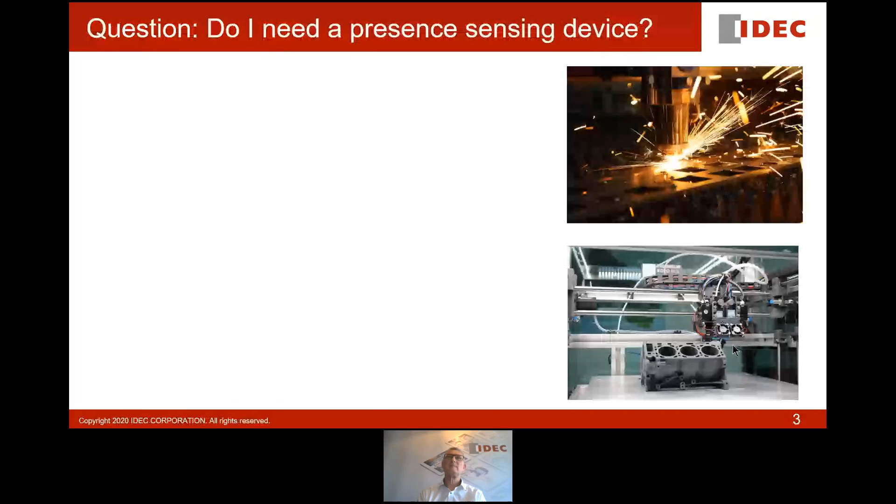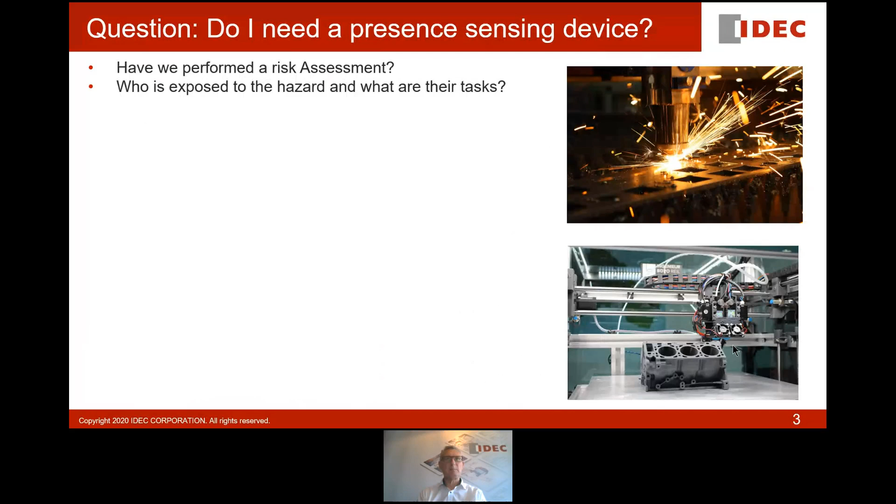So, some questions. Do I need a presence sensing device? Well, as in all of the other webinars I've done, there's a very simple question: have we performed a risk assessment? We need to identify who is exposed to the hazard and what their tasks are, what they're doing on the machine. Once we know what the individuals are doing and we've made a list of all the people who are in contact with the machine, we have to identify the target.

Is it their hands, their fingers? Maybe they're leaning into the machine, so it's upper body. It could be that they have to lean a long way in and there's a risk to the torso, or perhaps stepping inwards would create risk to the lower limbs. Potentially, as for example with robot cells, you have to go whole bodily into an area which has got a lot of space around it, like a robot.

Once we've looked at that area, we have to say, well, if we want to use a presence sensing device, is there in fact a risk of part ejection? Because of course, once we remove the mechanical guarding that is separating us from that hazard, we have to consider, is there, for example, any risk of swarf being ejected out of the machine as it's cutting? Perhaps material from pressurized processes could be ejected either through a fault or just because it's what happens when you open the tooling. But it needn't necessarily be a mechanical obstruction or a mechanical risk.

It could be radiation. It could be the ejection of sparks coming out from a weld cell. So yes, we're looking at a robot and we're protecting against mechanical contact with the robot. But in car plants, for example, you see sparks going 5-6 meters away from the center point of welding. We have to identify there's a mechanical release of parts.

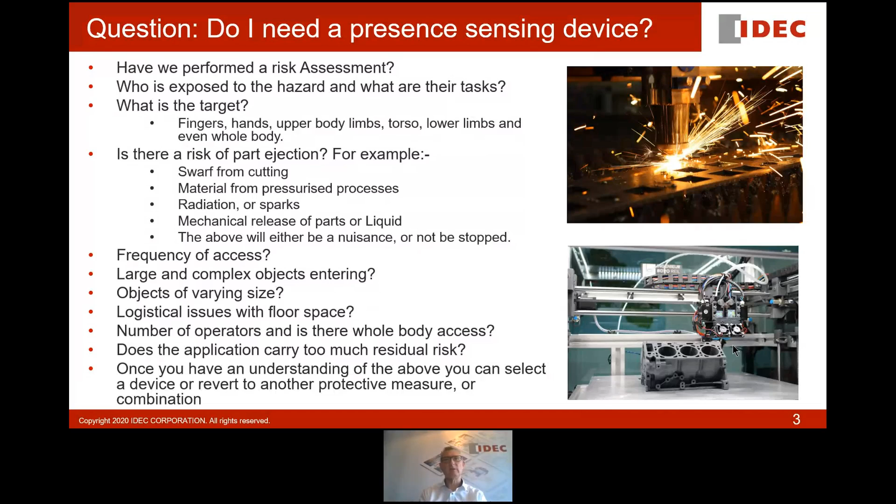At the end of any application, you should always look and see whether or not there is a level of residual risk that you can tolerate. If you can't tolerate it, you go back to the beginning of the process and start again until you've reduced that risk. Once you have an understanding of everything, then you can select your device or potentially revert to another measure. Quite often you actually revert to a combination of measures between perhaps a light curtain and some guarding and a pressure mat and so forth.

We use presence sensing to effectively prevent harm. The most obvious thing is we have a gap in front of a machine, and we perhaps put a light curtain across the front of that gap, and that creates an invisible perimeter. Usually it's very obvious because 99% of light curtains are painted yellow and they stand out very clearly as being there for a reason.

It's quite common to combine that light curtain along with other mechanical measures like side guarding and such like. But of course, we can also have protective measures like pressure sensitive mats, and we can use laser scanners which detect and send out a beam into the area. We'll talk about that a little bit more in a moment.

But the key to selecting your presence sensing device is stop time testing. The purpose is that we should identify the position of the device in relation to the hazard once we've ascertained the known direction of approach. So from our risk assessment, the man moves from the pile of material to the machine and he walks through in this direction, or he reaches in this direction, or even steps in that direction.

Therefore, if we know where he is moving from and to, the next thing is to determine how fast he is going. And that is the approach speed. So it's really important that we measure the real stop time. And not only do we measure the real stop time of the machine, but that we identify the actual machine conditions over its entire life.

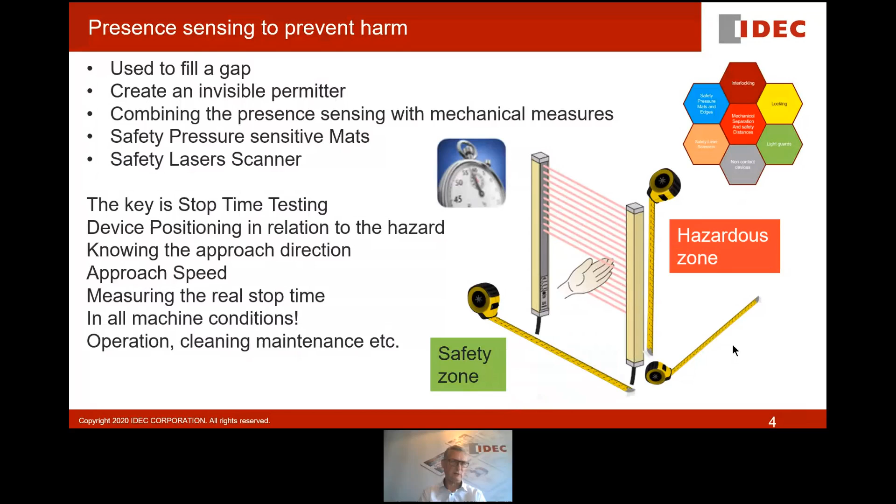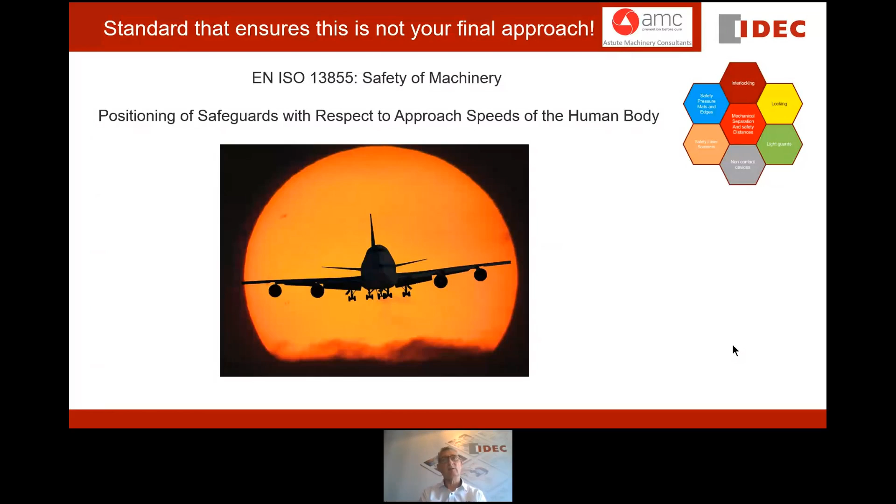So in order to do that, we have to get on to the boring bit, which is EN ISO 13855, safety of machinery. It's a harmonized standard under the Machinery Directive. And rather cheekily, it's put there to make sure that it is not your final approach to the machine. It deals with human approach speeds.

To come back to the very beginning, we do this because the Machinery Directive very clearly states that moving parts of machinery must be constructed in such a way to prevent risks, and the installation of guards or protective devices have to be put in place to make sure that you keep the operator away from that hazard.

And of course, you have mechanical guarding, which is covered by EN ISO 13857 and talks about the reach over, reach under, reach round, and reach through, the position of your guards.

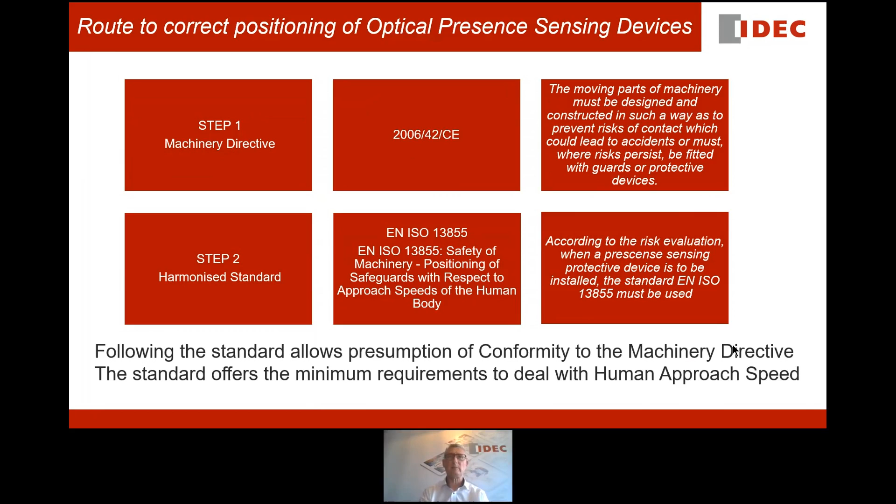And 13855 helps you calculate and understand where to locate a presence sensing device so that the machine has come to a stop as a result of that switching off function and then the loss of the residual speed or energy that is present during the shutdown process. We'll talk about the stop times in a few moments.

So we can use light curtains, pressure mats, laser scanners, in fact, any device that detects the proximity of a worker in the workplace, provided that device has a monitorable safety function that complies to one of the harmonized standards of the Machinery Directive. But we shouldn't just consider the light curtains and the mats and the scanners.

We also must remember that a fixed guard may also require a stop time test. And you might say, well, why would I do that? It's a guard. Surely when I open the guard, the switch goes click and the machine stops.

Well, a single guard, when you open it, does stop, and it does create a gap that you can then place your hand through. So if the machine is going extremely quickly and you open the guard, you still need to put your guard sufficiently far away from the hazard so that it's come to a halt.

And if you use things like hinge switches, there is in fact typically a 5-degree hysteresis, so that you can move that open 2 degrees, 3 degrees, and it won't have switched. And if that's a big door guard, you may be able to get your hand in, and therefore, the triggering point allows quite a depth of your hand to go through before it in fact switches off.

And that really brings us on now to the means of detection. So we have some pretty fundamental things. We want to detect people's hands, and therefore typically there is a resolution of 14 millimeters or less of the protective measure. And that means that your fingers, as they pass through, will be detected very early.

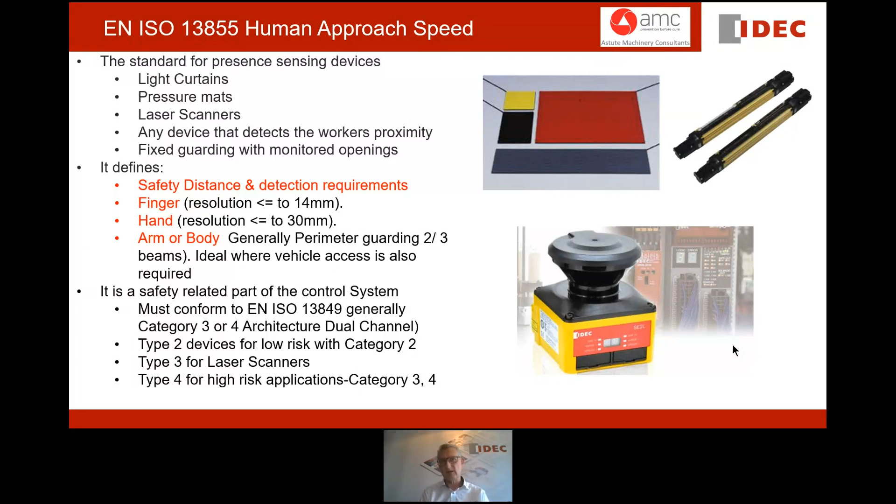So 14mm light curtains for finger detection, 30mm light curtains for hand detection, 40 for upper, 70 for lower limb. So there we're starting to talk about people stepping forward and detecting the ankles. And then we also have 2 or 3 beam multi-beam detection, where there are extremely large gaps between the beams.

And then we come into the area of, well, surely a human being can step through or lean through. And when you are utilizing the large beams, it's for a perimeter, which is considered to be a significant distance away from the hazard. And we do it so that we can make sure we can have easy access for maybe forklift trucks and that type of thing.

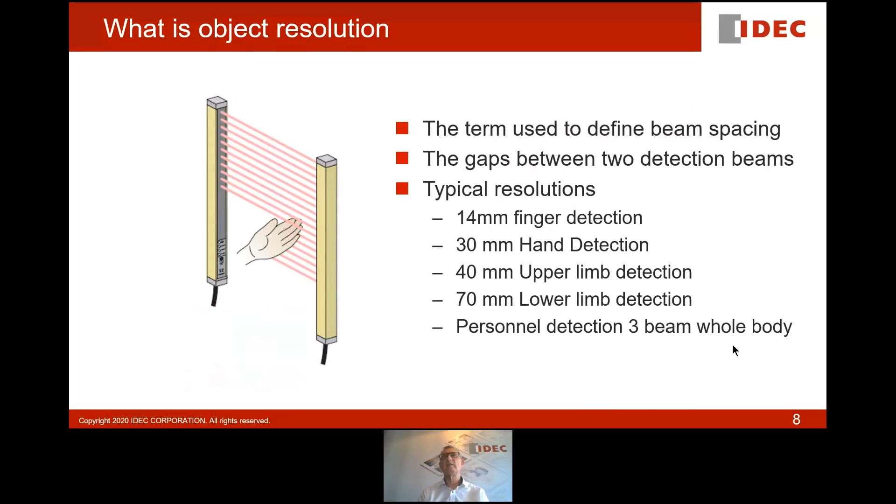So what makes up the stop time of a machine? It's quite important that we understand the principles.

So the stop time is the time from when the protective measure is actuated, so when I cut the beam or when I step on the mat or stand in front of the scanner, until the process has removed the energy and that risk has gone away. Or if it hasn't gone away, it may have been reduced down to an acceptable slow working speed. So we accept that risk is okay. So it may be going very slow.

And it's achieved dynamically by measuring the dwell time between that stop trigger point and the actual removal of energy from the machine.

You can actually generate your stop time using software. For example, if people are using complex control systems with motion control and they've got that motor directly coupled to the machine, it's generating the motion. Because of the motion analysis software that exists, we can actually have a very detailed analysis of exactly how long it takes for that shaft of rotation to come to a halt.

So it is quite common for people to determine their stop time using their motion analysis. Now, I have to emphasize, you can only do that if the motion and the motor is actually directly coupled. If it's belt driven, you shouldn't be doing it. If it has some kind of reciprocating motion, you shouldn't do it, because it's unlikely that you're going to be able to detect all of the angular deflection as well as the backward and forward detection.

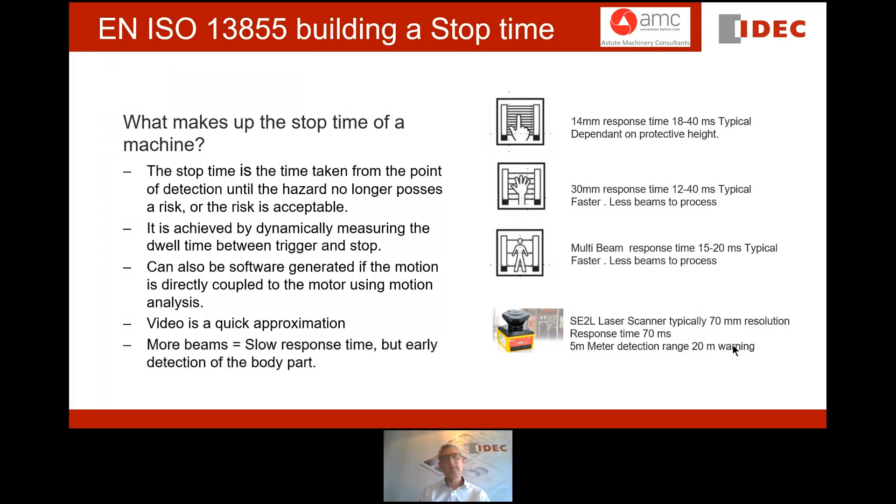So let's have a look and see what it actually says in the standard about stop time. Well, there's 2 numbers you need to remember, 3 I suppose. The letter T is the total stop time, and T equals T1 plus T2.

And T1 is the actuation of the device, the putting of the hand through the light curtain, and that light curtain's response to actually shut down its output. And once it's shut down its outputs, it's going to turn off things like a safety relay.

The safety relay is going to feed to the PLC, which is going to switch off the primary switching elements, which is then going to turn off the final drive. And then if there is any residual energy, finally we get to the termination of the hazardous machine safety function, which is C. So you have T1, chopping the device, stepping on the device being detected.

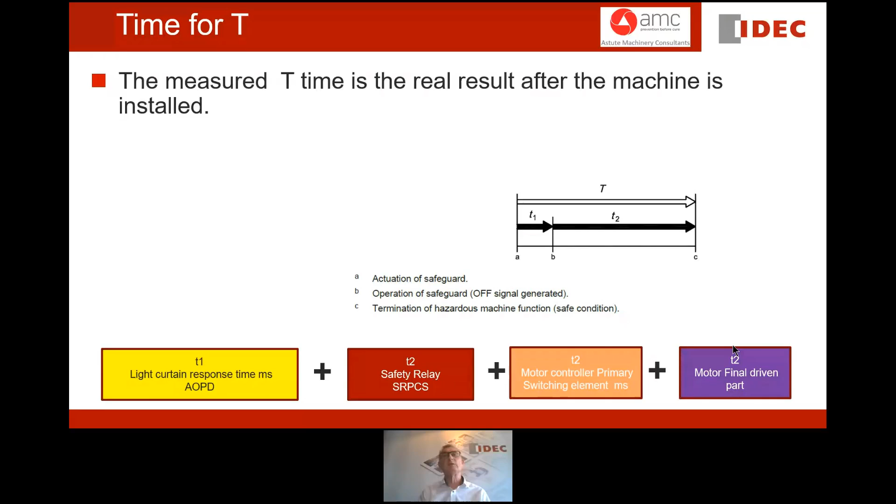Then you have the sum of the items that are in the control cascade to shut it down. And then you've obviously got the physical movement and things that step away.

So you need to make a design analysis. The design phase, you need to make an analysis and understand approximately where you're going to be. But it's really important that the final installed piece of equipment is tested. And also, periodically it is tested, because as bearings wear, as machines bed in, then the rundown times continue.

Maintenance may fit a new variable speed drive, for example, and as a result, the frequency may have been 55 hertz or 60 hertz instead of 50 hertz. Well, that means that the machine is running faster. If it's running faster, it may mean that it actually takes longer to run down because of the 20% increase in speed that would project.

So reasonably regularly, maybe once a year, once every couple of years, do a test to make sure the machine is actually still working in the way you expected it to be.

And as I've said on every single presentation, you do a risk assessment whenever you make a change on a machine's function. If you change its fit or form, you need to also go through and make sure that your light curtain is in the place that it should be, that was intended by the manufacturer when they designed it.

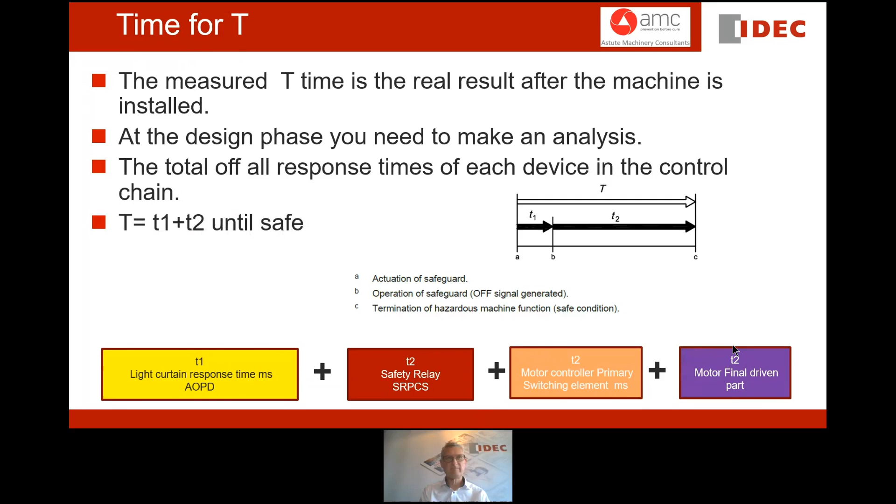So it's possible that we might want to combine measures. For example, in the bottom right, you see there's a light curtain combined with mechanical guarding. It makes sense because light curtains are pretty expensive devices, and a robot can aggressively make mistakes, especially during programming. So if you have a risk of part ejection or side ejection, you put the mechanical guarding in. It's a cost-effective way of doing it.

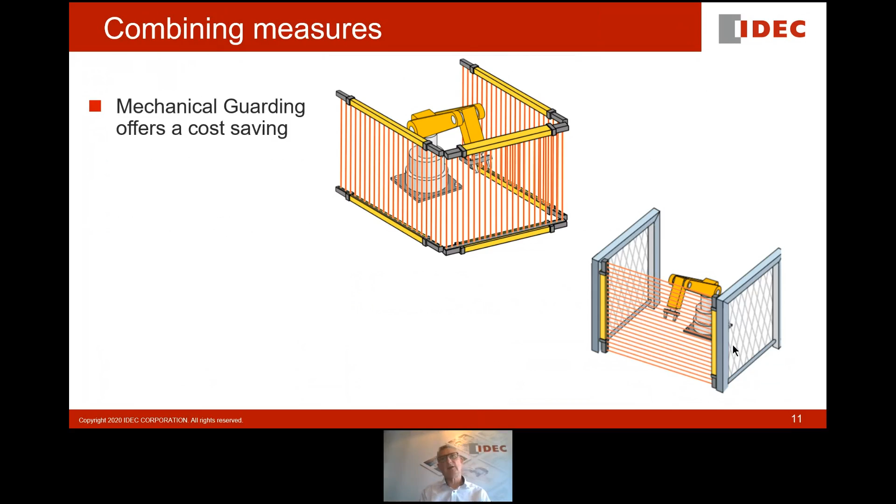However, if space is an issue or you need access from multiple directions, it's quite conceivable that you could put in light curtains either in the vertical, like shown here, or in the horizontal as well. One idea is to actually have the light curtains set back out of the way, and then you simply put mirrors in the two leading corners.

If you cascade, you can get great flexibility in the workplace. You can get multiple operator access going in from multiple directions, which is useful in a two-operator environment where you've got left and right feeding. It's very flexible, but it also has to be taken into account in the risk assessment, because anybody can walk into that zone.

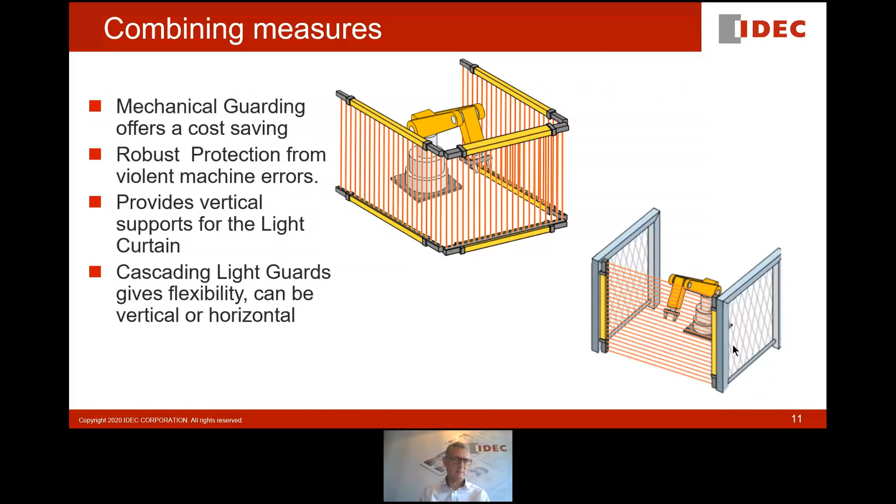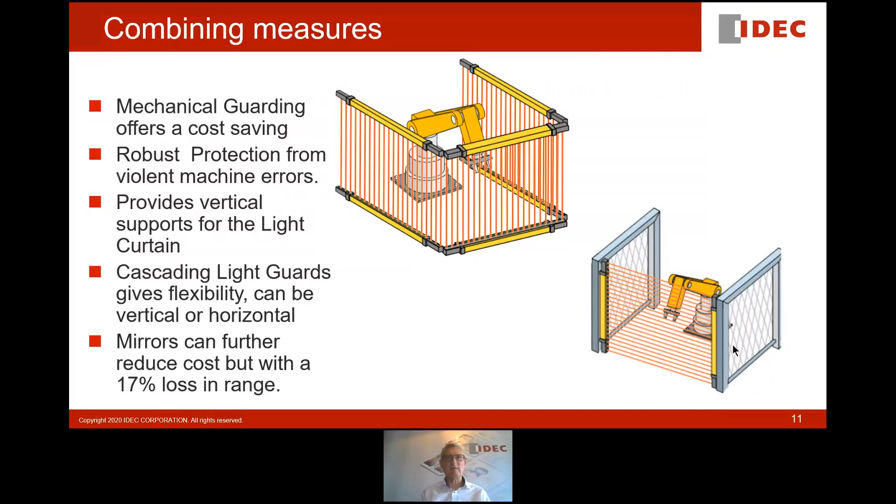If we project the light around the machine, we can do it. It's quite easy to do. But we have to remember that as we project it around, each mirror you go through can lose as much as 17% of the range. That's actually really important, because if you've got a 10-meter light curtain, you go through a mirror, that mirror takes away 17% of your sensing range, and the next mirror takes away another 17%.

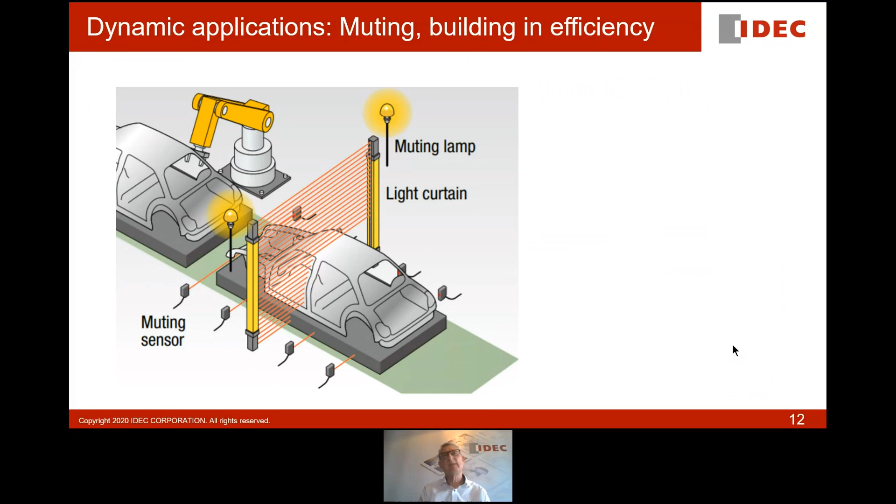So if you install light curtains, you need to do it in such a way - and I talked about this before regarding the automotive industry - of moving products through, detecting the product, but not actually ensuring that the person can pass through next to the product that's going through. And that way we introduce muting.

Muting is a deliberate suspension of a protective measure. And it has to be temporary. And it has to be designed to avoid accidental or deliberate entry by an operator.

So when a light curtain is triggered, you'll notice there are muting sensors on the illustration. They detect that there is a vehicle approaching, and it forms a controlled cascade of temporary shutdown of the light curtain, and then a controlled reinstating of the light curtain.

It's important that the spaces to the left and to the right of the conveyor and the product that is there - it's really important that people cannot walk through those gaps. They can't use other objects to try and trick the sensors, because if you pick up a cardboard box and walk through the beams, you will look remarkably like a car or a cardboard box, and you can then trip the device in an unsafe way and get in.

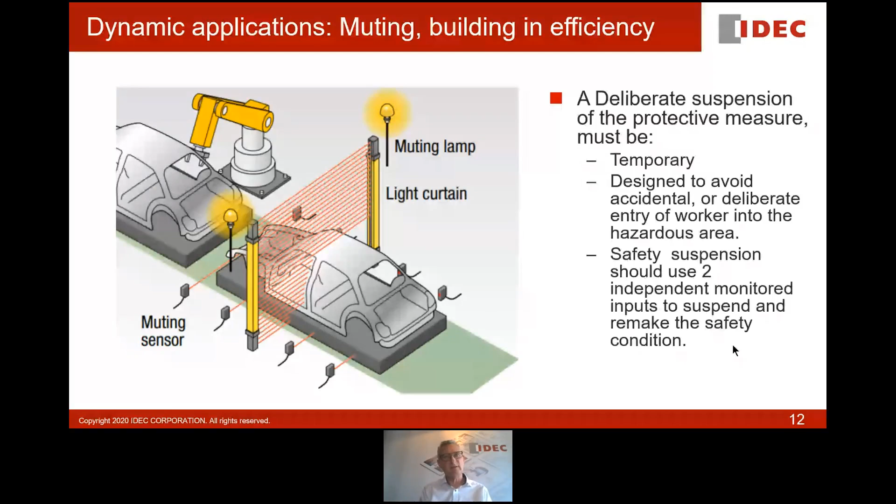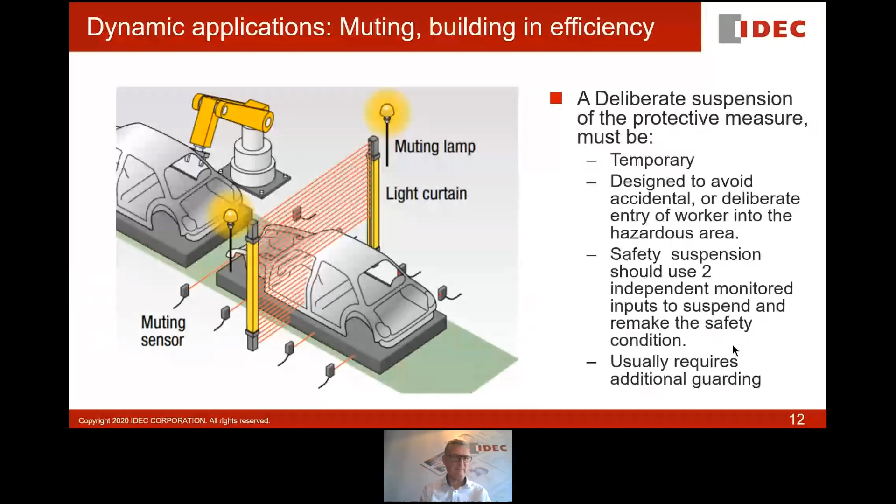So the positioning of the beams is absolutely critical, and they have to be monitored. They use a monitoring technique and a monitoring relay that is preconditioned and set up to try and stop people from triggering, tripping, and cheating on the application. You often need mechanical guarding and additional measures to prevent people from getting in, so giving them large amounts of space either side is a bad idea.

But there's always the case where you fit your protective measure, and you think you've done your calculations right, and you need to pass the conveyor through. We've got some nice flat products there on the conveyor, and we want to pass the conveyor through, and we need to use a thing called fixed blanking.

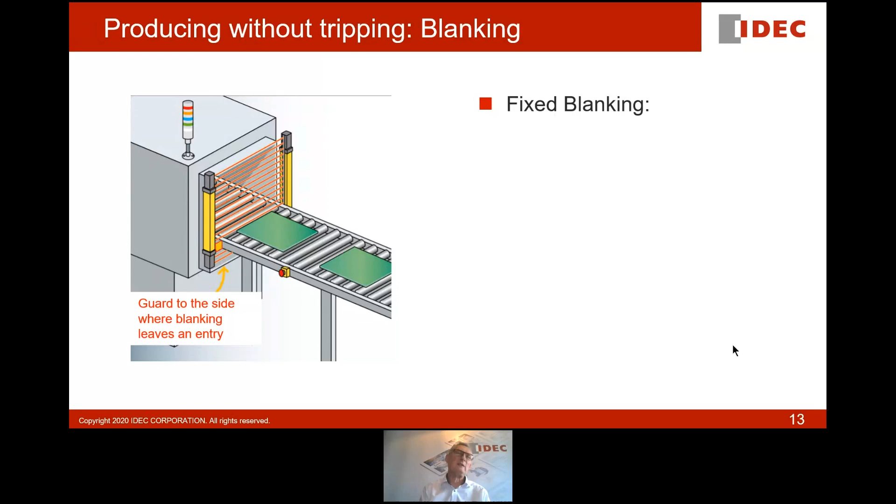But when we put the fixed blanking in, we actually have to teach the light curtain to ignore the structure that is put inside it, because obviously the light curtain currently in that application would trip on it. So we install the guard, we install the light curtain, we install the conveyor, and then we have a situation where it won't work. We go in and program out the beams. So once we've taught it, it ignores that intrusion. But that also means that to either side of it, there is now a gap.

If, for example, that was a 14mm light curtain and we've cut out 2 of the beams, we've now got a gap of 14 plus 28 plus 14. That is enough for me to get my arm through. So if you look at the left-hand side of the illustration, you'll see a square representing a piece of mechanical guarding that's been put in, because currently the resolution isn't 14mm, it's arm detection at 40mm, and therefore we'd have to move that guard substantially further back from the hazard.

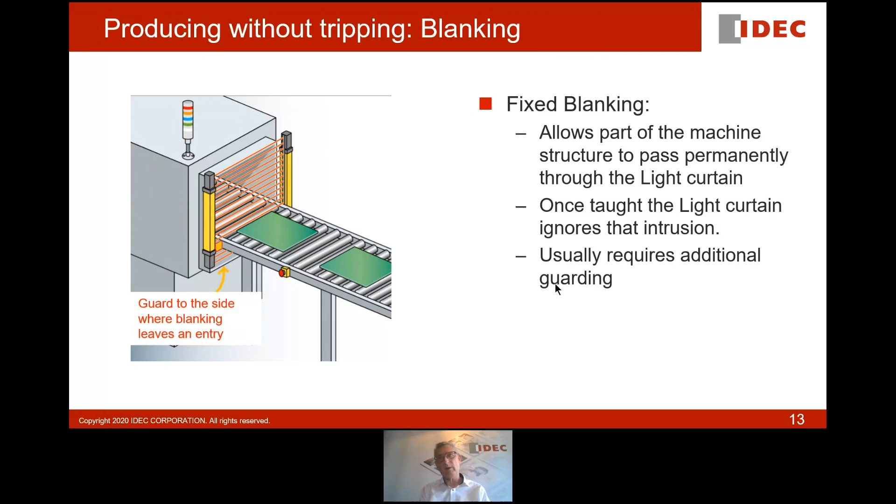So it usually requires that additional guarding. I've got to say, in my 8 years of consulting prior to this role, nearly every time I saw blanking, the customer had forgotten to install the mechanical guard. And when they had moved the guard away from the machine, they had failed to put side guards in to prevent people from reaching around.

But a lot of applications aren't as cut and shut as fixed blanking. If you go into the metal stamping and pressing environment, you'll see a reel of material being unfed, or in the paper industry, a reel of material being unfed, going into a machine. It will flex and go through light curtains, and periodically, yes, it will trip the beam. So for that, we have a technique called floating blanking.

What happens is that as it cuts a beam, the beam above or below it can then dynamically be switched off. So if we cut one beam, the one above or below allows a non-tripped condition, and it allows it to flex, because as the material goes slack, it will drop, come back up, and go back down again. This gives us a very dynamic condition.

But again, like with the other one, because I'm allowing one beam above and below to be switched off, I've also reduced the resolution. So it's very flexible, but you're guaranteed that you need to move the light curtain further away, because our 14mm light curtain can no longer detect our hand — if we put our hand next to the material, or at the same point, we can create a non-trip condition, because we can get through this large gap. It will only work at the beam that is cut, the one below or the one above.

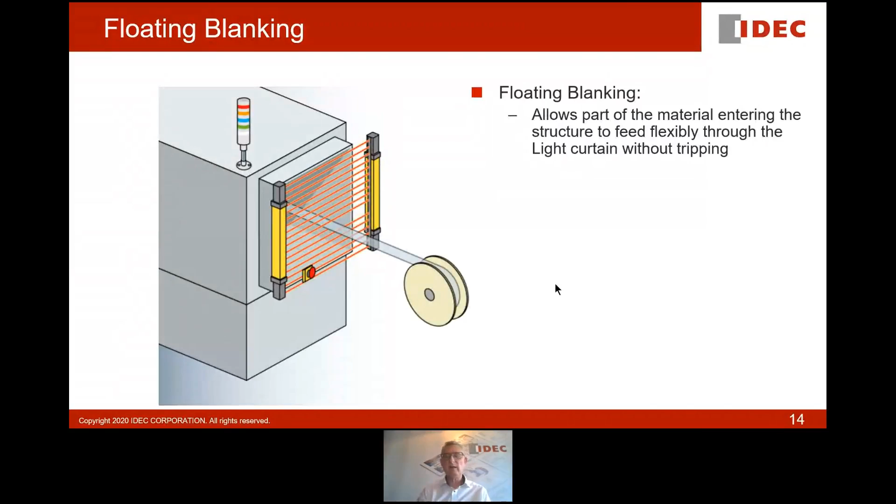So you can't just reach in at the top and get it to mute. It will only be floating blanking at that place, so it ignores the intrusion and allows the material to flow and flex going through.

Hello? Sorry, oh, we've lost Tim for a moment. Do apologise. Tim, are you back with us? I can hear you, can you confirm you can hear me? We can hear you now. If you can go back a couple of slides, sorry. How far would you like me to go back, Andy? Just one slide. Yep, this one? Yep, that's it, thank you.

So laser scanners allow a lot more flexibility because they can look around corners. As you see here, this one could look at 270 degrees of angle. We can teach it to ignore parts of the machine and be very flexible in the environment around it.

It's used in areas where you have very complex pieces of equipment moving in and out. It's also ideal if the structure and size of the machine changes, determined by maybe a vehicle being there, or the size and width of it changes. So it's quite dynamic because you can program it with different patterns and it automatically adopts the new pattern you've programmed in. Plus, the fact that they can monitor encoders gives you the chance to identify speed, direction, rotation, and even use it on mobile applications.

Most important thing in relation to EN ISO 13855 is the detection and the safety detection range. So our scanner has a 5-meter detection range, but what's neat is you also get a dual warning zone, and you can get up to 20 meters of warning in front. That warning can be used to give different speed conditions and such like, and we'll cover that in the next slide.

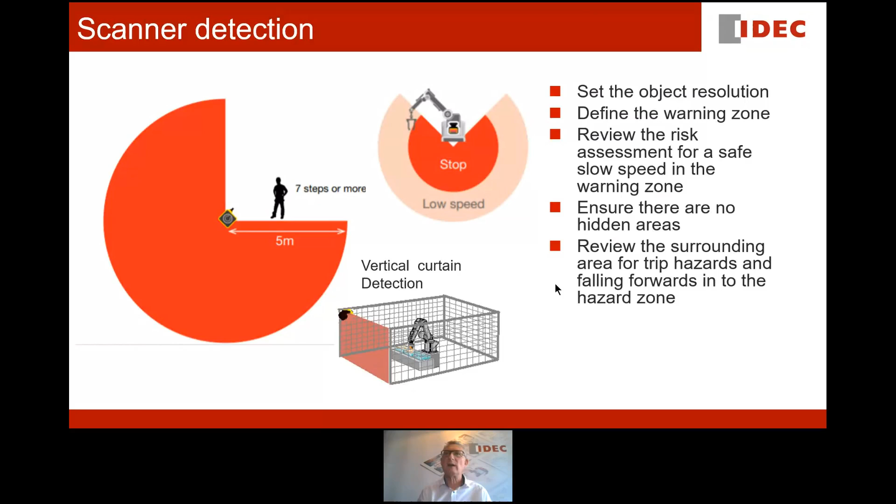Now, the laser scanner - people tend to visualize it as being something that's multi-directional and multi-angular. It's not. It's a single slice over 270 degrees. It's ideal for laying on the floor, and as people walk up to a machine, it's going to detect them at ankle height and change the control environment of the machine to make it safer.

But you can also use it as a dual control. So if you've got two robots and you're trying to calculate your approach speed for that, it's quite nice to be able to say robot 1 continues working at full speed, robot 2 is being taken to a stop condition. And if you've got the dual warning zones, you may have done a stop time test, you've done your risk assessment, and with your dual warning, you can say okay, warning zone 1 brings the machine down to a slow, safe working speed. On a robot, that might be 250 millimeters per second.

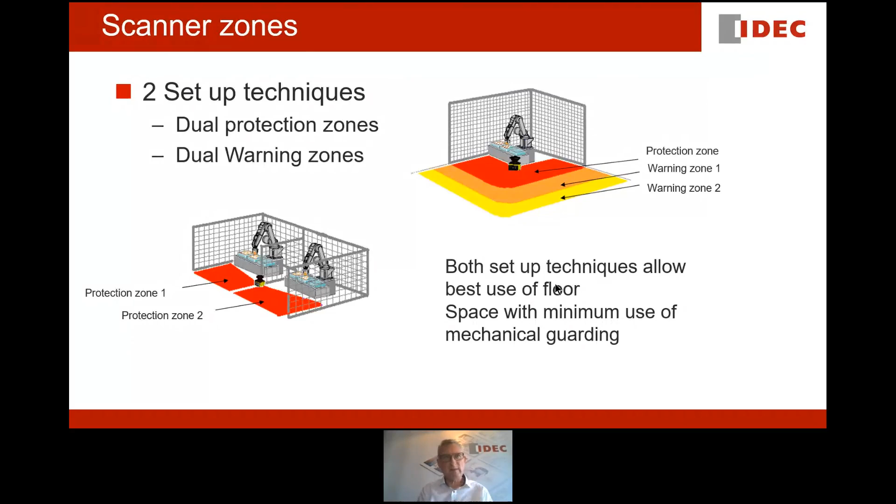Operators can then be close enough to make a visual inspection without getting too close. If you get a little bit closer, then the alarm bells go off. And then if you get to the final point, then you get a trip condition. So they help maximize on floor space and efficiency. Overall, they can be used in a very dynamic way compared to the fixed allocation that you might have in a light curtain.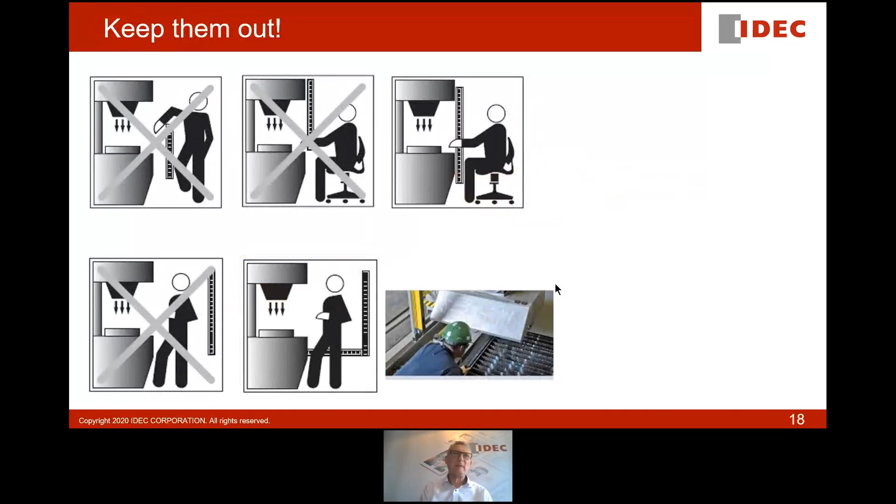So all of this is targeted at keeping them out - that's what we're trying to do. Operators may either accidentally or intentionally try to bypass the safety measure. So the goal is to detect the ingress of a person in front of a machine, and we're trying to limit the reach over, the under, the round, or just passing through so fast that their hand reaches the hazard. Because of that, there are calculations that we need to do.

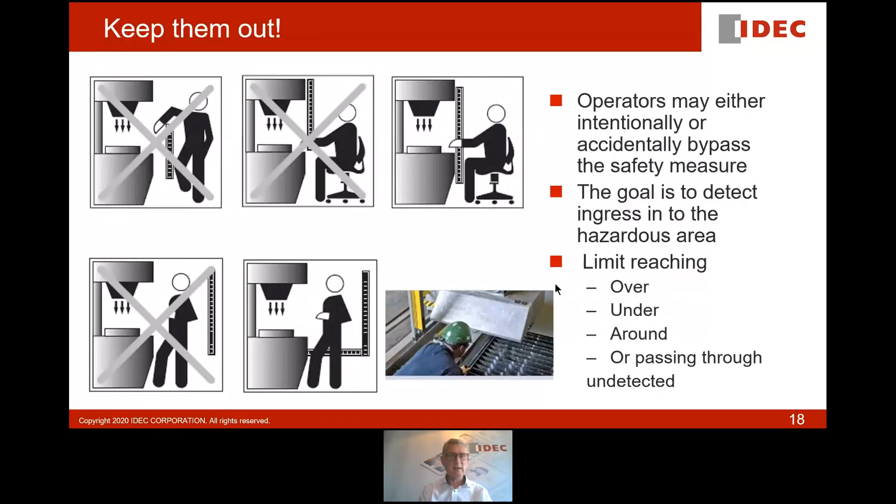I'm sorry, we're getting to the boring bit now, but we do have to make those calculations. If you look at that photograph at the bottom of the page, you can see that light curtain is actually suspended quite a distance above the conveyor. That means the operator can in actual fact reach underneath and touch the area immediately behind. So how far he passes through and how far he can reach through before he's being detected is a critical part of selecting a presence sensing device.

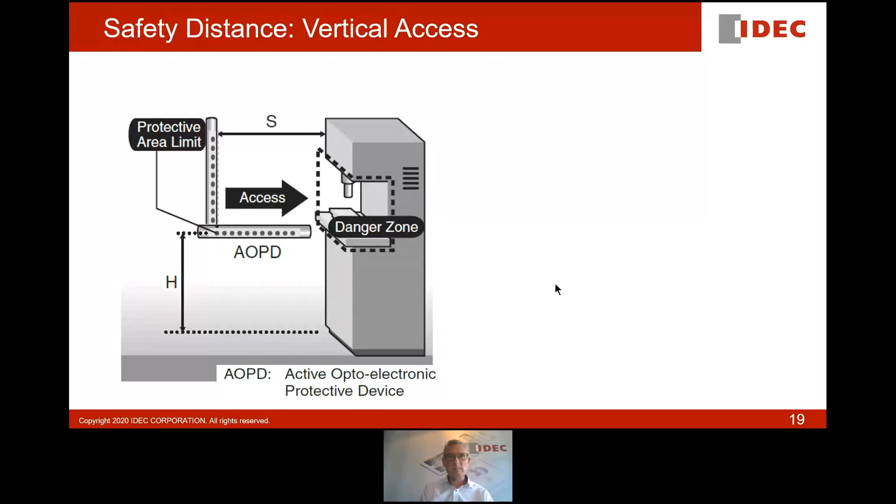So just going to touch on the key principles of selecting the device and the calculations now. These aren't all of the calculations - this is a 55-page standard. We would be here a lot longer. But I want to touch on the principles and the numbers that you need to take into consideration.

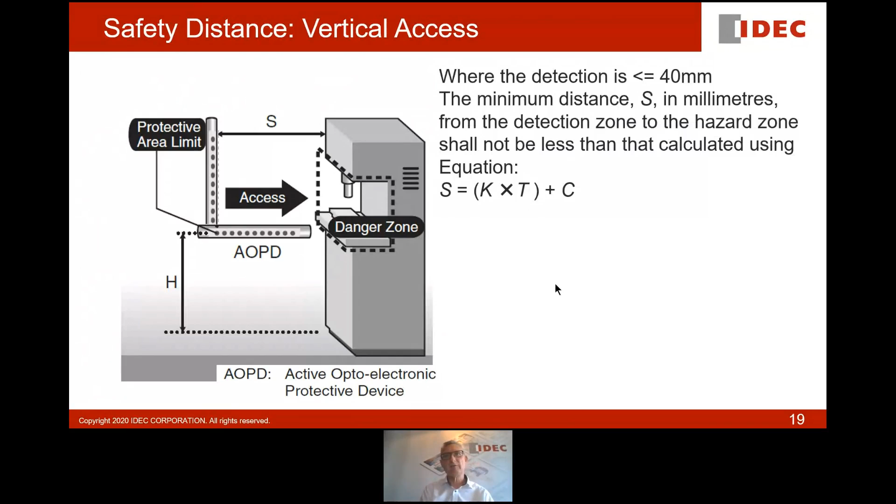So if you've got a detection zone, a light curtain where it is less than 40 millimeters, you need to use the calculation S, the final safety distance, equals K times T plus C. Now I know you're all going to remember that, so I'll just run through exactly what that breaks down into. K is a constant - it's the human approach speed. If you don't really get an idea for what the human approach speed is, reach out and take your Apple iPhone and just nudge it to the edge of the table.

And then with your index finger, flick your iPhone as if it's going to smash on the floor. I can assure you that you will reach out at 2000 millimeters per second. It is the human reach and grab speed.

The next thing we need to do is identify the time. I've spent quite a lot of time already talking about that, because this calculation requires us to identify the total stopping time from when we cut that beam until hazardous energy has gone away. I won't go any more about that.

But then we have C. We have to add this factor in. What we're doing is we are using it to determine how far the human can get through the protective measure.

The letter D, that is the object resolution of the light curtain or device that you've used. In that instance, if we put a 14 millimeter curtain in there, that would be 14 minus 14 multiplied by 8, comes up with a number of 0.

So it can never be less than 0. The reason it says never less than 0 is because a couple of countries in the world actually have 12 millimeter resolution in their standards. That means you would end up with a minus figure, which is not acceptable. So the D is the sensing capability, the resolution in millimeters.

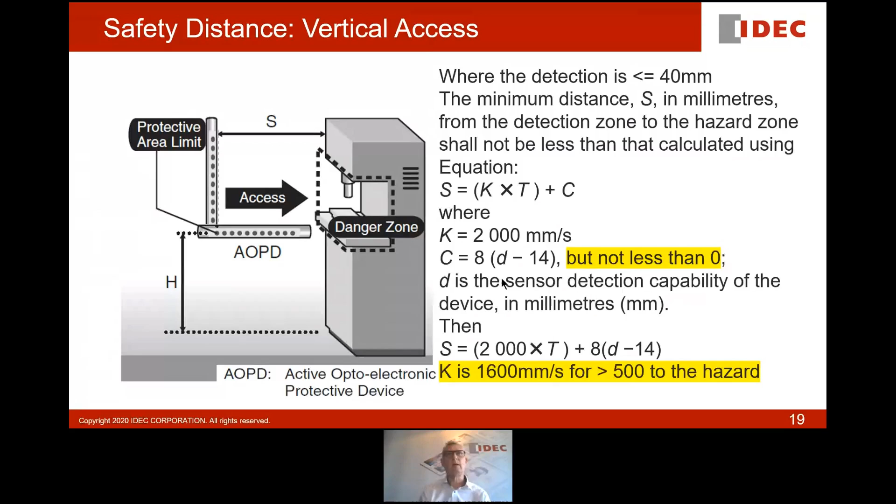If the hazard is more than 500 millimeters, the human approach speed is reduced because now we've got movement of the upper torso as well as the kind of snatch reflex of the hand. The human has to make a little bit more movement. So we reduce the human approach speed down to 1600 millimeters and we substitute it. That is for vertical access, the most common way that light curtains and protective devices are installed.

But when you go up in beam resolution and beam separation, you now need to accept the fact that a lot of you can get through that light curtain before you're detected. For that reason, we use the 1600 millimeters in the same calculation, but C becomes a constant.

And it's constant because we know that the human arm, which is considered by the standard 13857 to be 850 millimeters, that the typical human arm is 850 mil, and you can reach a long way through prior to you actually getting detected. So C then comes in at 850 millimeters.

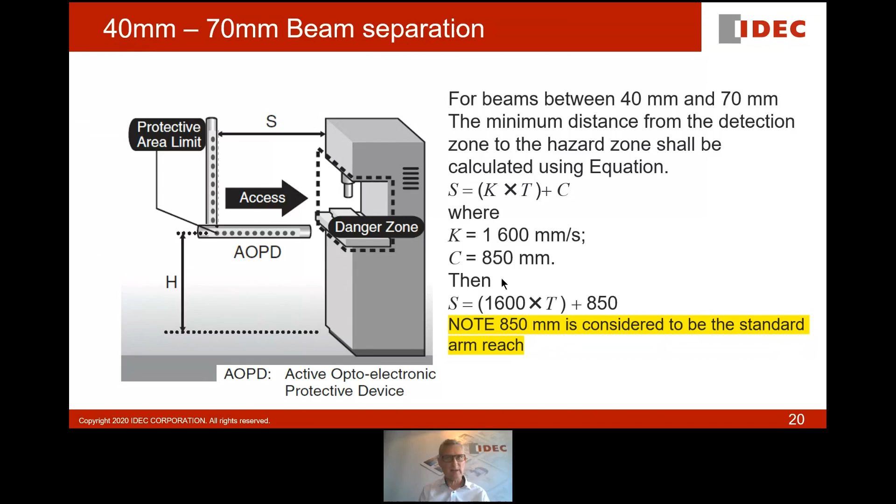So you need to address the type of light curtain to make sure you've selected the correct calculations. S equals KT plus C is the basic one, but then C has different values depending on the technique that you're using.

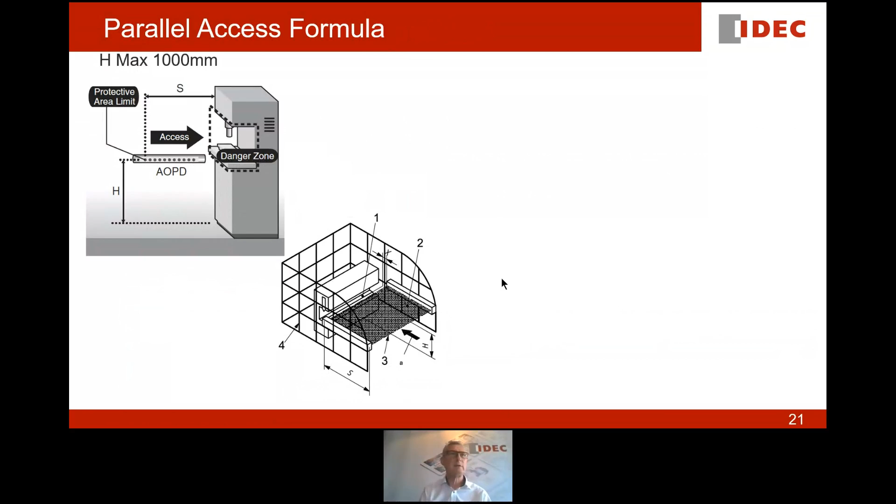Don't often see the parallel access, but I do see it in automotive industry where we've got equipment that lifts up and flips over, like inverting service tables on robotic cells. And that's where you mount that light curtain in a horizontal position.

Now we have the issue, of course, that the height of the curtain and the trip point is likely to be your waist. So we need to consider how far the human can reach over.

In that instance, we've got 1600 millimeters again because of the slower, bigger safety distance. But now we have 1200 millimeters coming into the equation because of the articulation of the body and the additional reach of the human arm. And it can never be less than 850 millimeters.

Plus, in addition to that, we need to take into account the height of the curtain because clearly, if you can crawl underneath it and reach up, there is a risk that you have increased the hazard and allowed someone to get much, much closer. So you need to take that into account as well.

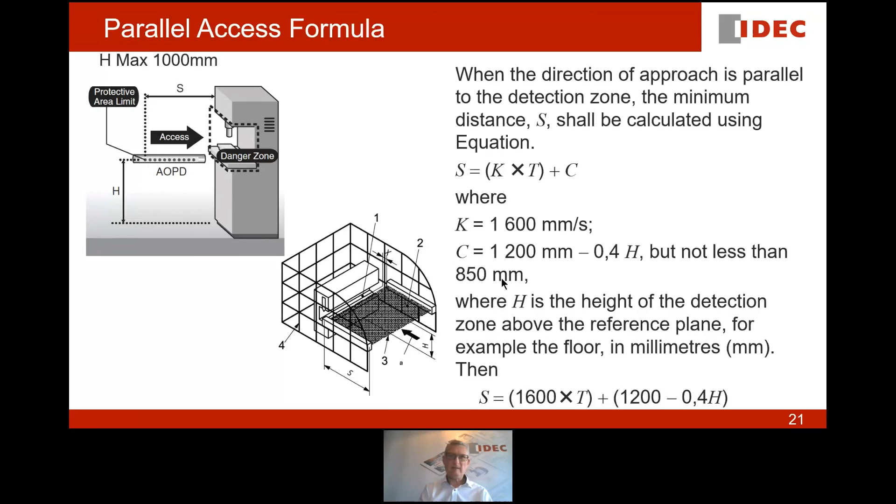So finally, the next thing to discuss is whether or not angled can be utilized. Now, angled is quite useful because you can gain a good protective area. You can get it a lot closer to the machine.

It allows you to protect downwards in front, so that lowest beam has to be taken into account, and the first trip beam as well.

And it's great when operators are carrying a piece of work in their hand and they can hold it down low, approach the machine without creating a trip condition. They've got the workpiece in their hand and then they can lift it up and enter it in. As the body and the arms come into the zone, they're going to be picked up by the angle of the curtain.

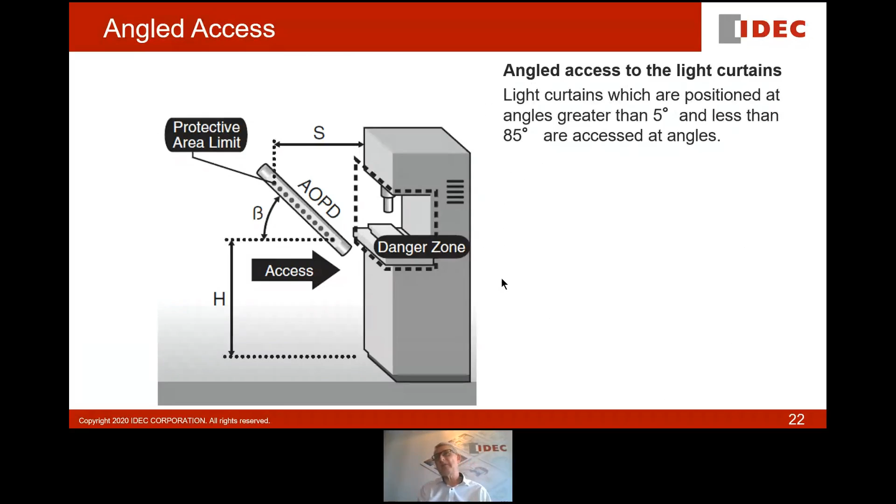But there are conditions for setting it. And if you set the angle wrong, you then have to revert back to the calculations that I showed you initially. So if the light curtains are positioned at angles greater than 5 degrees and less than 85 degrees, then that's considered to be an angled access.

But if it's less than 30 degrees, then you have to default back to the vertical. And likewise, if it's greater than 30 degrees, then you have to default to the horizontal.

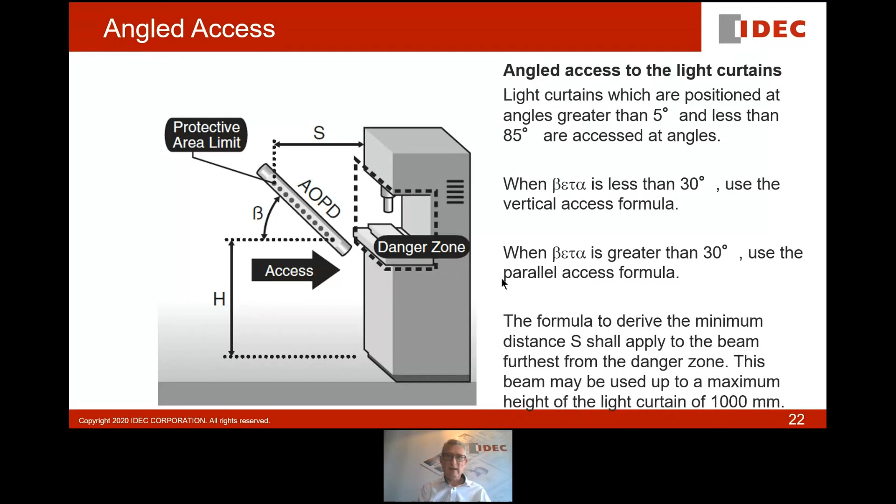Most importantly, the position of that first beam, where the end of the protective limit is, has to be absolutely in the right place. Otherwise the human, as they walk in, won't be detected early enough, taking into account that he's got his arms out in front of him and he's holding something.

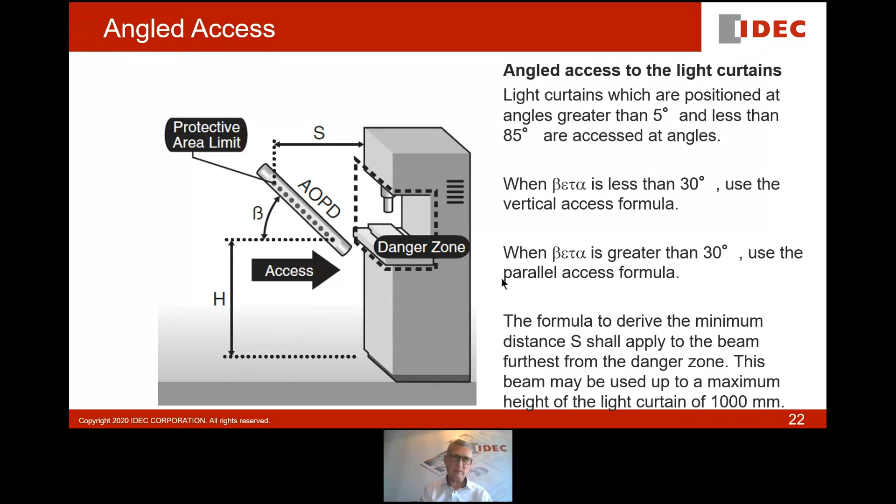Every time, make sure you determine the access. I've talked about mechanical guarding—is there a way of going around it? There's no point putting a light curtain in if you can just reach around the sides. I'd say that was about number 2 on my consulting failure list: people simply able to place their hands around the protective measure.

Coming towards the end now, we need to remember a few things about setting up and utilizing the light curtain. When you've installed it, do your stop time test, but make sure that if you've got multiple light curtains, they're not looking at one another, because if the left-hand transmitter is received by the right-hand receiver of another machine, it will fail.

I installed some on a Friday afternoon, and by Monday morning it had completely failed, and we couldn't work out why. When I went in on Friday there were three machines in a row. When I drove back to the factory, the middle machine, machine number 2, had been decommissioned and removed, and my light curtain was now cross-talking with machine number 3.

So it's important to put a mechanical obstruction in. I had in fact put a mechanical obstruction—it was another machine, but nobody told me they were moving it at the weekend. So make sure that you don't get crosstalk.

A great deal of light curtains now have digital coding, so we can code the beams, which allows us to filter out that crosstalk. But that doesn't mean you're not being picked up by another manufacturer's light curtain.

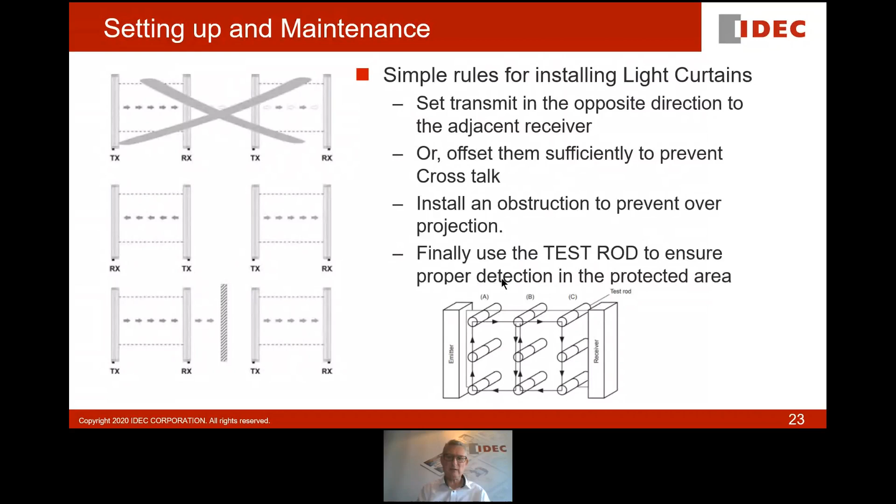Once you've made the installation, it's really important that you use the black rod that comes with the light curtain—it's called a test rod. That test rod is used to trip the beams and create a rotation. You go around in a figure of 8 pattern on its side, checking top to bottom, left to right and down, repeating that pattern. If you achieve that test, you can be assured that every part of that protective area will save your hand, your arm, or ultimately your life.

So as a summary: make sure you assess the risk, do your stop times, remember you're measuring not only the depth but the height and the width, the distance apart. Ensure you've got your safety distance calculations correctly done. Install the device, make sure the lenses are clear and protected against impact.

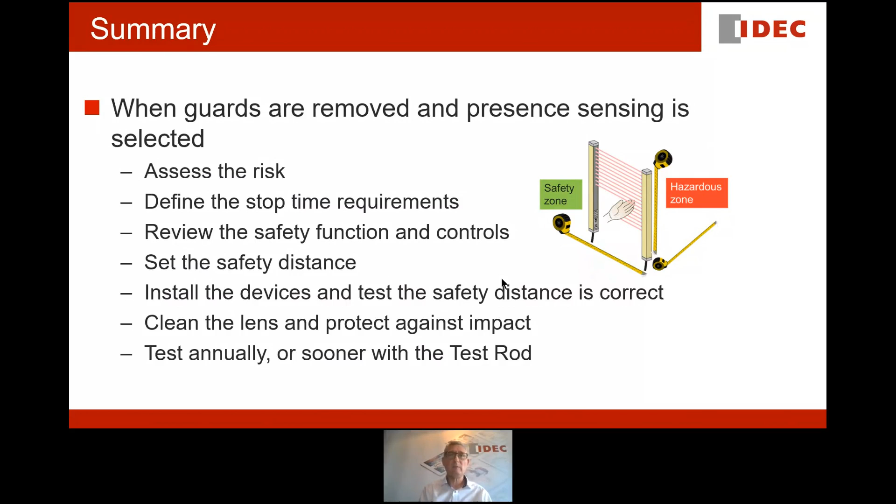Do your tests annually or sooner. There are no specific recommendations, but you should do stop time tests at a period of time where, if you've done a risk assessment and the machine is likely to be in an aggressive environment, you do them at a greater frequency. If you look after your light curtains and install them properly, they will be in there for a great deal of time. This is the last of the webinars, and I want to wrap up with this last slide.